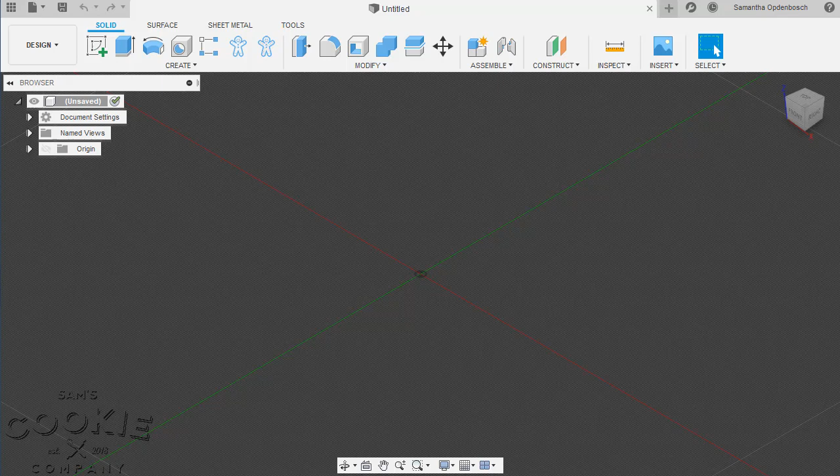So here we are in Fusion 360. I'm going to go ahead and insert my canvas, which is the clip art. I'm going to insert from my computer. I found this cute little butterfly. Just to remind everybody, I purchased a package of images from Creative Market.

I purchased the commercial license because I'm going to be making cookie cutters that I'm selling to the public. I'm going to select this bottom plane, which is where I want to put my canvas, which is my butterfly.

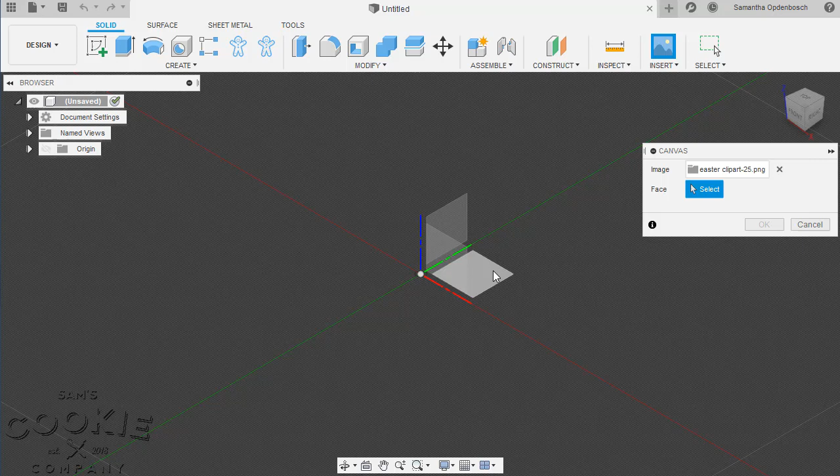Now I'm going to go ahead and scale plane XY. Here I'm going to scale it 5 times. A lot of times my clip art comes in and it's pretty small, and I want to make sure I can see what I'm doing. So I'm going to go ahead and hit OK.

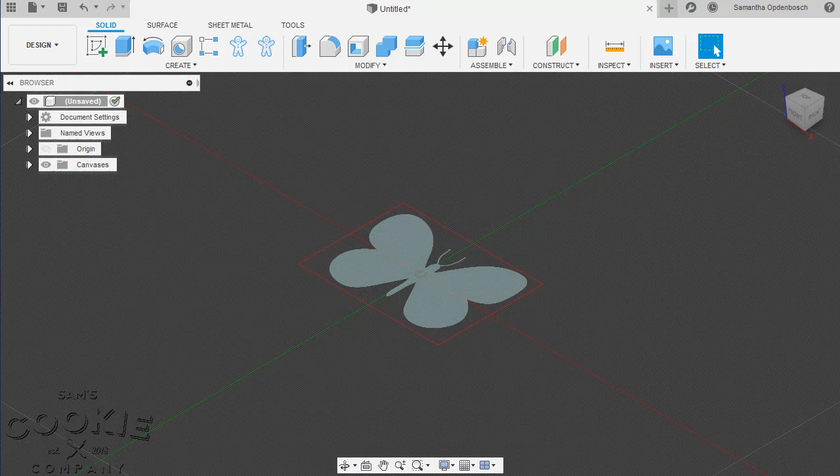Okay, so let's go ahead and get our sketch started. I'm going to hover over this area right here. It says Create Sketch, let's click on that. It's asking me what plane I want to work on. I actually want to work on this bottom plane, which is our XY plane. So I'm going to click on that, and here we go.

I'm just going to go through a few things. I'm not sure how familiar you guys are with Fusion 360 and how things work, but I've got a mouse with a wheel, and as I pull the wheel closer to me, the image gets larger. As I push the wheel away from me, the object gets smaller.

One other thing that I do quite a bit is I pan a lot. So if I hold my wheel down and then use my mouse as I would normally, I'm able to pan around and move that. I do that a lot when I sketch.

So let's go ahead and get started. First thing we're going to do is draw a construction line down the center of our butterfly, and we're really only going to be sketching or outlining the left side of our butterfly. You could do the right side if you felt it was better, but we're going to do just the left side.

I've done this a couple times and it seems a little easier for me. So I'm going to click on line, which you see here on the left. I'm going to click that. I'm also going to click construction. We want this to be a construction line, and we're going to put that just about the center of our butterfly.

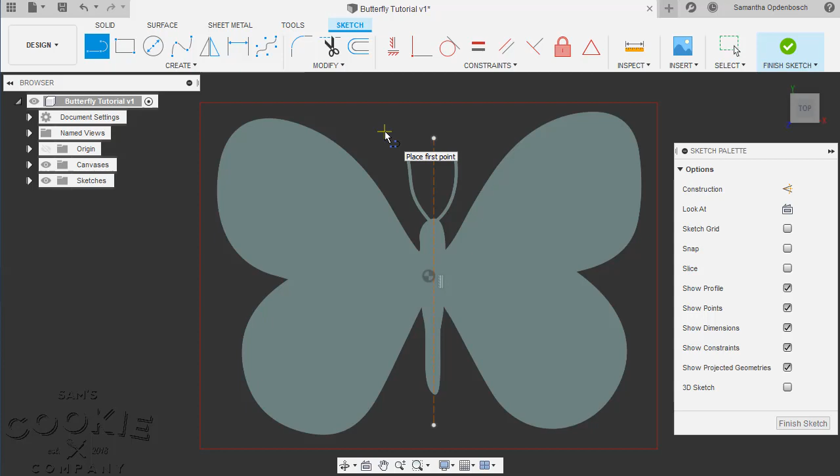If I were to leave construction on, then all those lines would be construction, and we really don't want all of them to be construction. So let's go ahead and get started.

So if you've watched any of my videos in the past, I have used this control point spline, and it was easier for me to use. Now I actually like the fit point spline. I know that's kind of crazy, I am an old dog, it's hard for me to learn new tricks, but I've learned this one, so I like it.

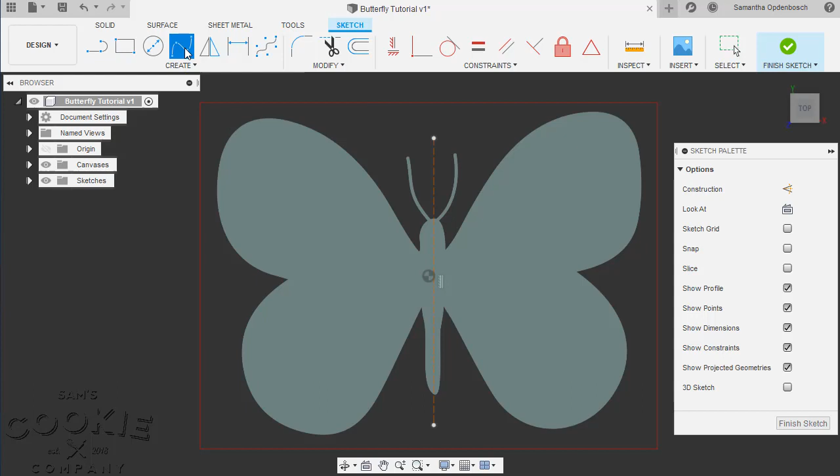So now I'm going to hit fit point spline. I'm going to zoom in again by using my wheel and going closer to myself. This butterfly has super skinny antennae, and I'm going to make an adjustment on the fly. I'm going to start from my construction line, and make those antennae a little bit bigger so they don't burn in the oven.

Every time I make a cookie cutter, I really try to keep the whole process of baking and decorating in the back of my mind. So this is going to make the most sense for me. I'm going to make these antennae just a little bit larger.

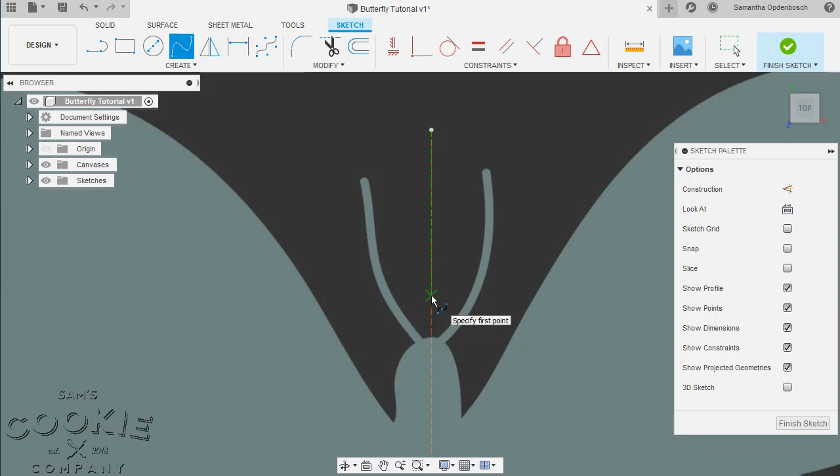I'm going to click on my very first point, which is on my construction line that we already made. And then I'm just going to briefly go around these antennae to where it kind of looks like it makes sense for me.

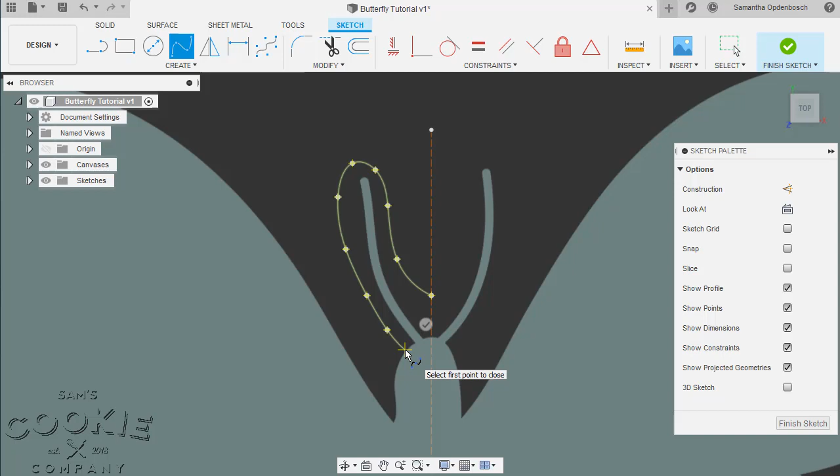And I don't think I mentioned it, but what I do every single time I do a sketch of some kind is I go from point to point, so sharp point to sharp point. So I'm happy with that segment. I'm going to go ahead and click my check mark, and then I'm going to continue.

I'm going to pan around to the next area, pulling it a little bit closer using that wheel again. I'm going to hover over the very last point that I made.

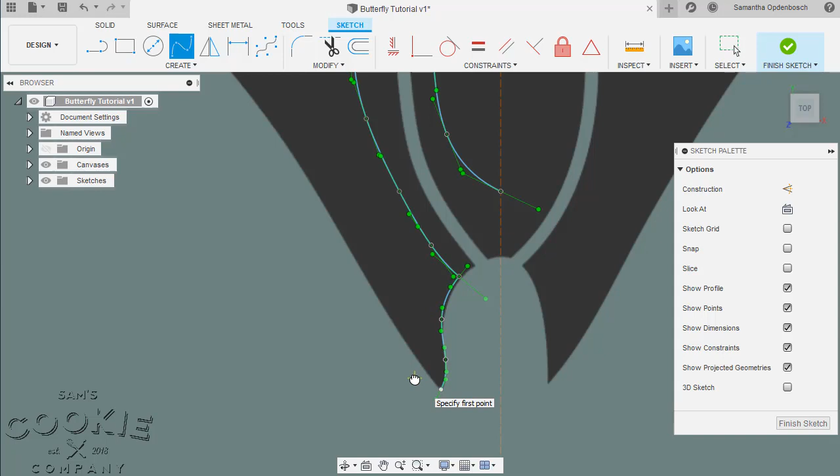I'm going to click on that because it's the first point of my new line. Then I'm going to keep using my fit point spline tool to the next sharp point. I'm going to click on the check mark because I'm happy with that. Then I'm going to go on to the next segment.

I want to say all in all on this one, we have about 6 segments. Now that you've got this larger curve, you can kind of spread out these points, but really do whatever is comfortable for you. I'm holding down my wheel anytime I'm panning around and using the mouse just like I normally would.

Take your time with this. I'm going a little bit faster because I've done this a couple times. Hit your check mark when you're done with that segment. Then I'm going to hover over that last point, start my next segment.

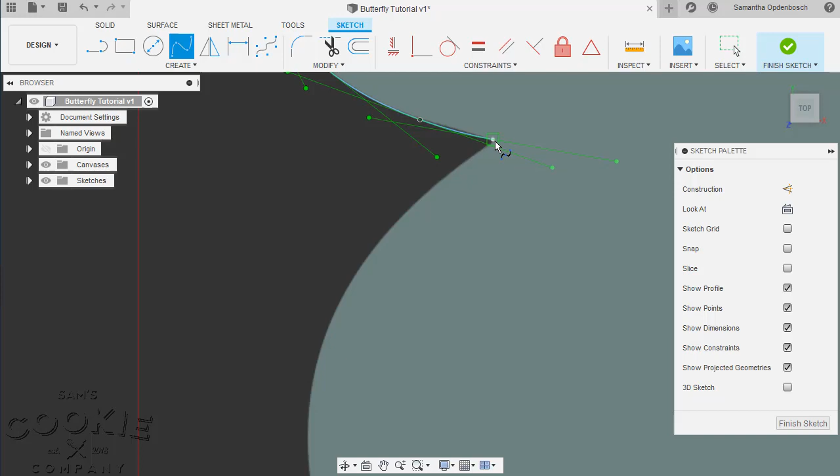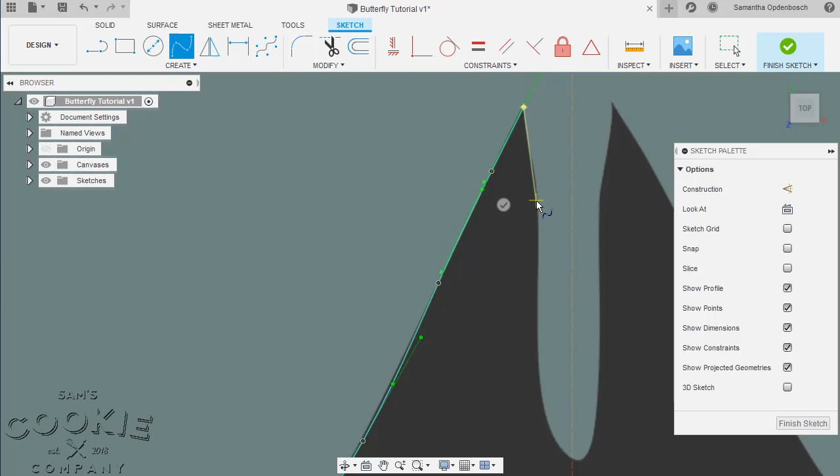Panning around. We're almost done with this butterfly, you guys. I'm spreading out these points on the straight runs. I'm going to stop one more time at that point, hit my check mark, hover over my very last point. Now I'm going to make just the very last part of my butterfly, and I'm going to end at my construction line. So I'm going to zoom in, try to make this area nice.

Once I hover over that construction line, you can sort of see that green X. It's telling me I'm right on the construction line. So I'm going to go ahead and click on that, hit my check mark.

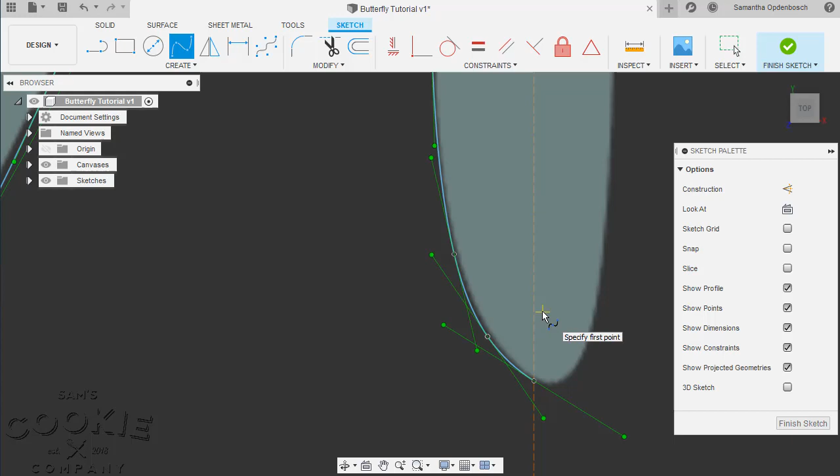I'm going to zoom in to see if I forgot anything. I'm going to hit select so I don't mess anything up. I'm going to zoom out, and then I'm going to click outside my butterfly so I can see it just a little bit better.

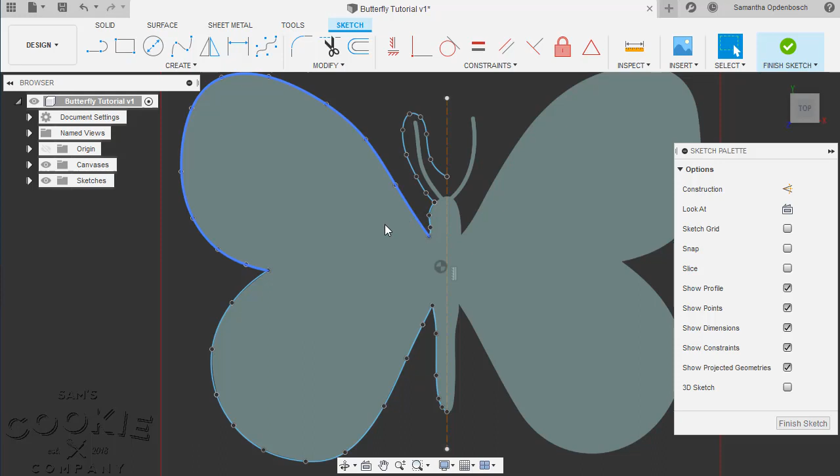Let's zoom in. You sort of see all these blue lines. Let's count our segments. I think we had 6, but I could be wrong. We've got 1 here, 2, 3, 4, 5 segments, not 6. So we have 5 segments here.

You can see our construction line is there. Our beginning point and our end point is on the construction line. So we are good to go.

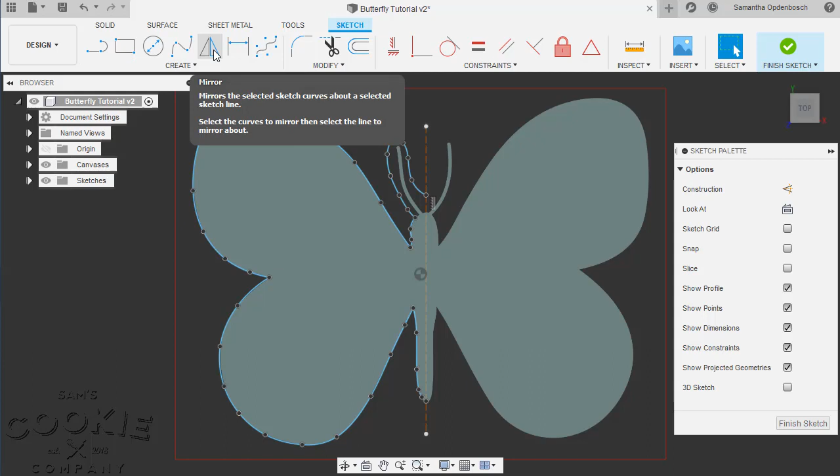Okay, so now we're ready to go ahead and mirror our sketch and go ahead and finish out the other side. So we've got this tool right here, it's called Mirror. I'm going to go ahead and click on that. It's asking us for 2 things: one is objects—that's actually the sketch lines that we drew—and mirror line is what we created in the beginning. I'm going to go ahead and select my mirror line first because that's easiest.

So I'm going to hit select, and I'm going to choose that construction line from the beginning. And then I'm going to select objects, so I'm going to click on that. Couple of important points here.

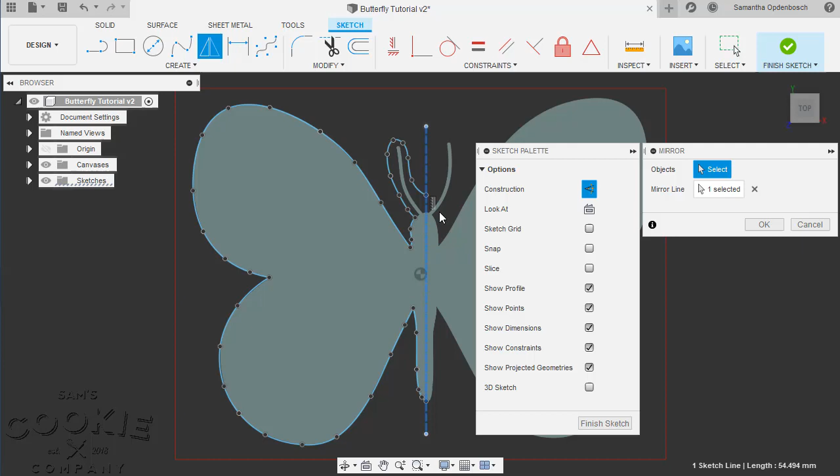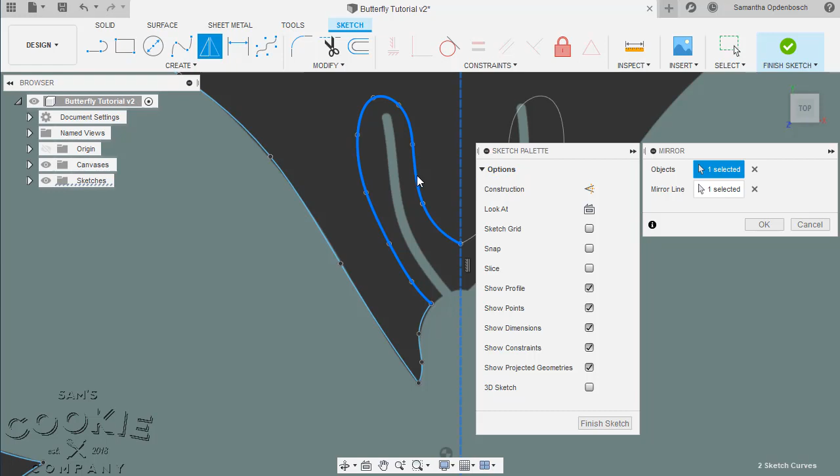I'm going to zoom in. See how I'm sort of hovering over the line and it's making the whole line kind of this really pretty cobalt blue. That's what you want to select. When you hover over these points, you see how it's white. If you click on that, it's going to kind of mess us up. So you want to zoom in and make sure that you've got this blue line here.

So I'm going to zoom in a little bit more. I think we counted all of the lines that we had, or all of the segments, and we determined that I believe we have 5 segments.

Then I'm going to zoom out just a little bit so you can see. Here we've got pretty much the entire left side selected. So we had 5 parts of our outline from before, and our mirror line, it says 1 selected. That is our construction line. So I'm going to go ahead and hit OK.

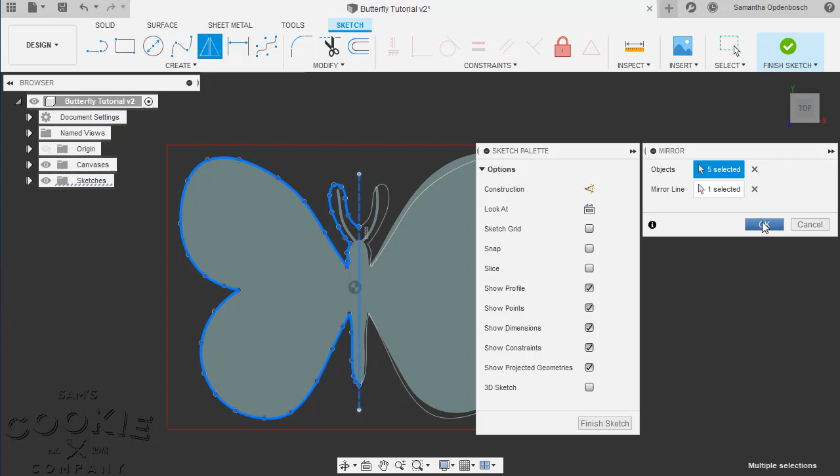And then I'm going to hit select, and I'm going to click outside my butterfly. I'm also going to uncheck constraints. And now you can sort of see the entire sketch of my butterfly. You can kind of see whomever made this piece of clip art, it's not exactly symmetrical, but ours is pretty symmetrical.

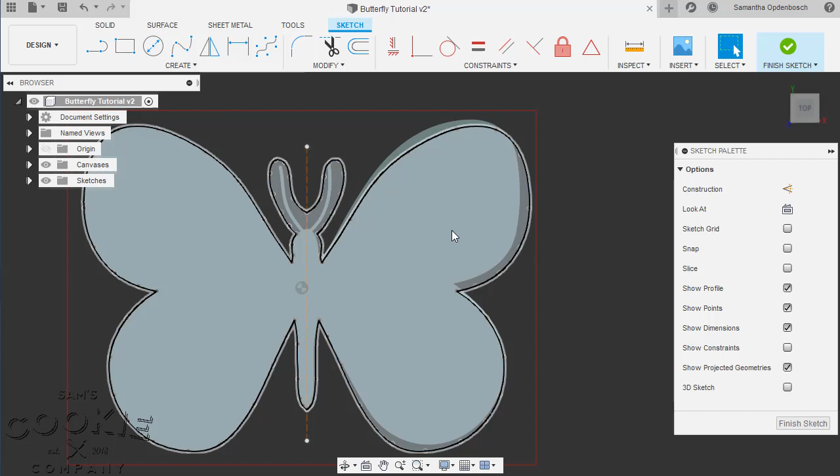So if I hover over, you see how it's selecting our entire butterfly. That means it's a complete closed sketch, which is what we need for our cookie cutter. So now I'm going to go ahead and click on the inside. You can sort of see we have it. It's one complete sketch, one profile. It's actually got an area

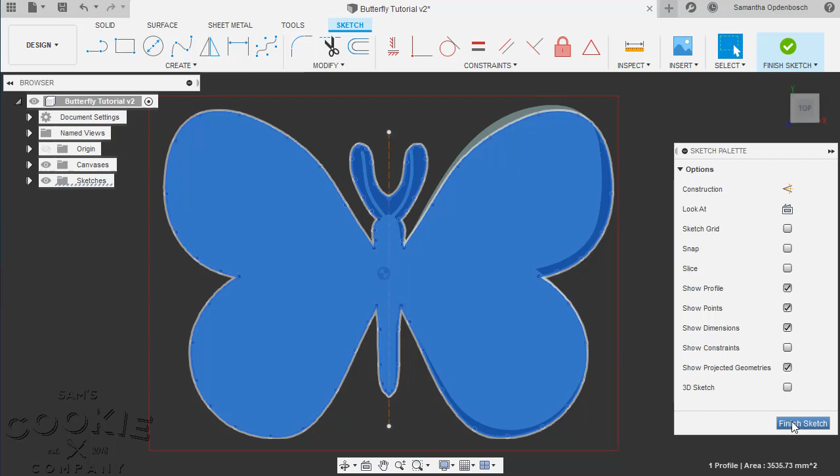associated with it, which is perfect. This is exactly what we need for our cookie cutter. Now I'm going to go ahead and finish sketch, and we are ready to build our cookie cutter.

Okay, let's continue and make our cookie cutter. I'm going to hit on the little home icon because I like to see when my cookie cutter is being built. I'm hovering over the gingerbread man—it's Sam's Cookie Cutter Maker. This is the Bella profile, which is actually my favorite. We're going to click on that.

Just a couple things: one, since I'm filming you can't really see this dialog box. I want to make sure you guys see there's that very last button there—it says Launch 3D Print. We're going to make sure we hit that one too, so I need to scroll down.

So let's go through this. We have one cutter profile selected, that's our butterfly. Mirror profile—we'd use this if we were doing words of some kind. Say you were making a cookie cutter that said 'hello.' Keep in mind you're making the bottom of the cookie cutter, which would be the handle, so to make the word hello appear correctly, you need to mirror it because the handle part is produced first on the 3D printer. We don't need to do that, so we're not going to check it, but just so you know that option is there.

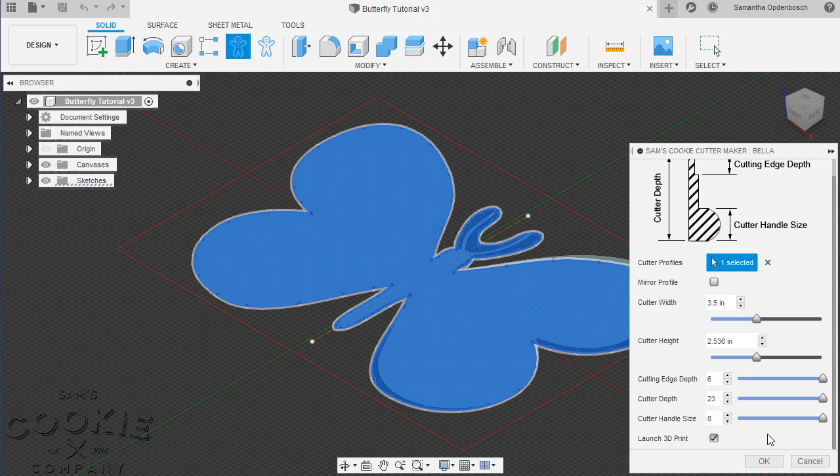So I'm going to check Launch 3D Print because I'm ready to take this over to my 3D printer, and I want Fusion 360 to talk to Cura and make that happen for me. I hit OK. We'll wait just a couple minutes, and there is our cookie cutter. I'm going to zoom out just a little bit. You can see our cookie cutter—he looks good, I think he's going to look great.

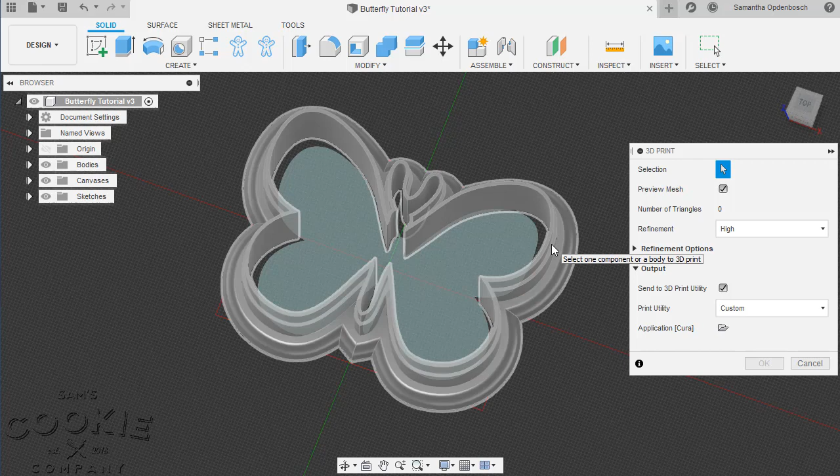So let's finish and get our G-code. If you'll notice the selection—this is our 3D print dialog box. I'm going to select the actual cookie cutter itself. There you see the cookie cutter being made.

Down here you see the application Cura. You want to make sure it says Cura—if it doesn't, click on the little folder, find your Cura, and make that connection. If not, it's not really going to work. But we set up ours ahead of time, so it's ready to go. I'm just going to go ahead and hit OK.

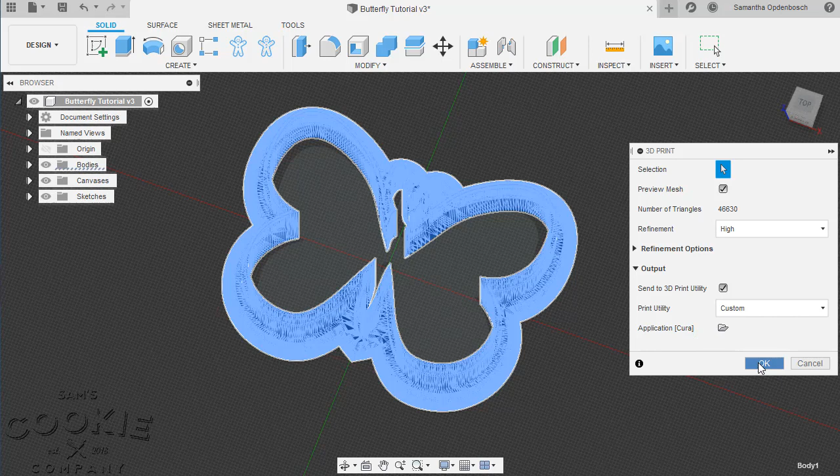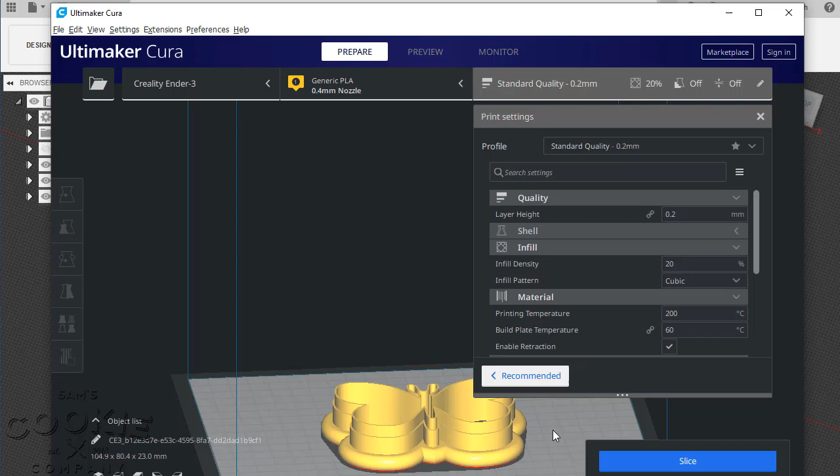Cura is going to come up, and we're going to see our cookie cutter. There we go, there's our cookie cutter. Let's go ahead and pan around so we can see it. Awesome, that's going to be so nice.

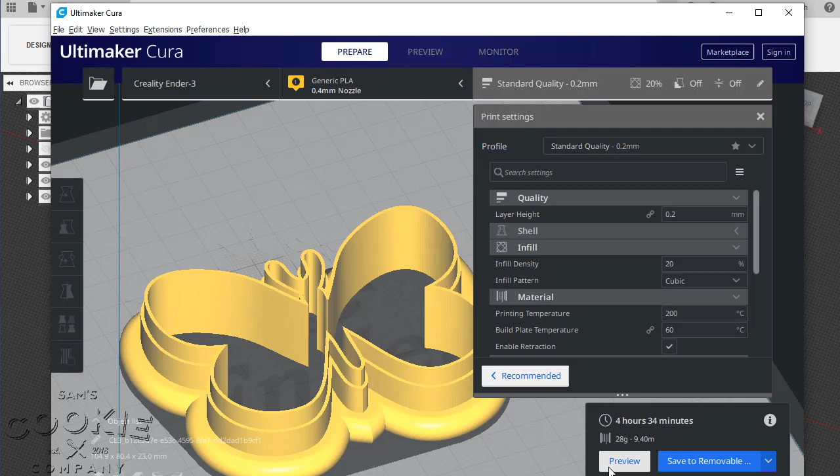Now we're going to go ahead and hit slice so we can get our G-code. And there you have it. I'm going to save this file, then put it on my removable USB, and put it into my 3D printer. I'm going to call this guy Butterfly, and then I'm going to save it. It's going to take 4 hours and 34 minutes to print this one.

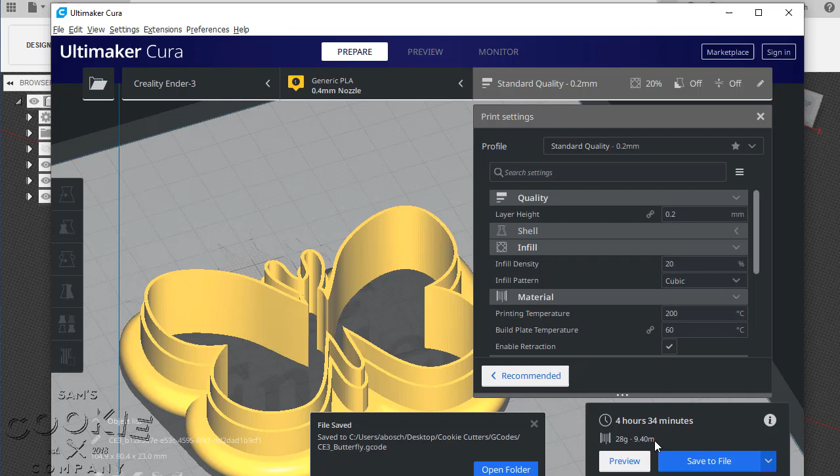This particular cookie cutter profile is for me—I really like having something sturdy to hang onto when I'm making my cookies. We're going to come out with other profiles; we also have the Sprinkle Factory profile, which prints a little faster. They're still just as sturdy, but I've already started using this profile for my cookie cutters, so I like when everything is all matchy-matchy. But do whatever works for you—if you think you'll only use a cutter one time, you may want to consider one of our other profiles that prints faster.